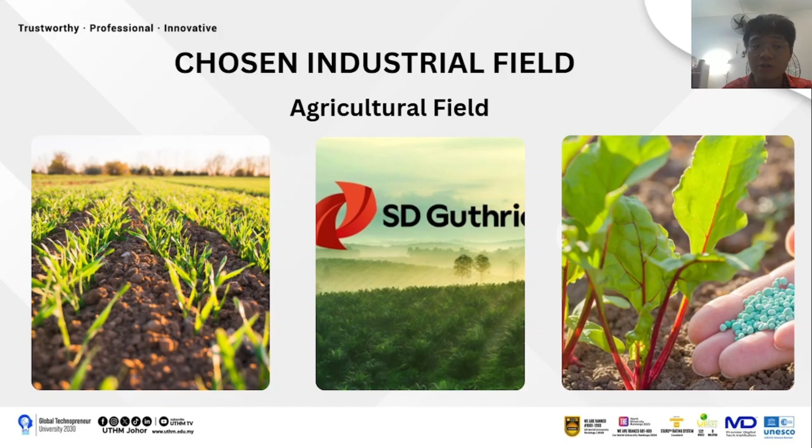Before we start, let me introduce the report contents: first, industries involved in the agricultural field; second, chosen industrial product; third, process involved in industry; fourth, advantages and disadvantages of conventional and green route processes; fifth, issues related to conventional process; sixth, impact of green route processes; and seventh, the related references within the last 5 years. So the first part is for me to present.

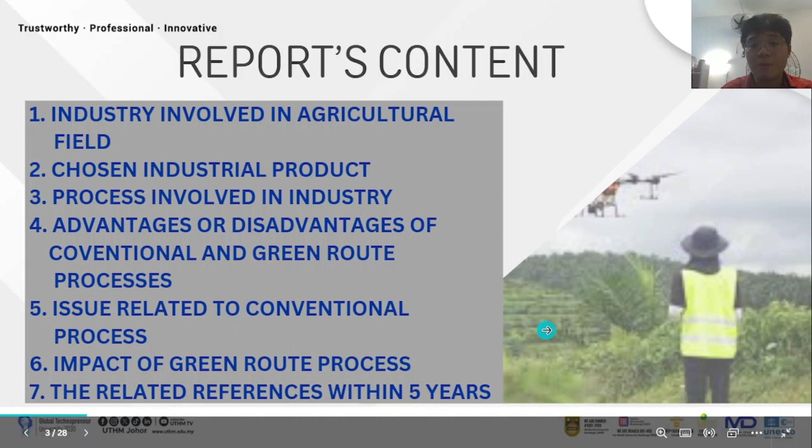Good day to everyone. I'm Won Zeng Cheng. The industry we chose, which is involved in the agricultural field, is Sd Guthrie Berhad. We chose Sd Guthrie Berhad as our industry because it is a large-scale local company.

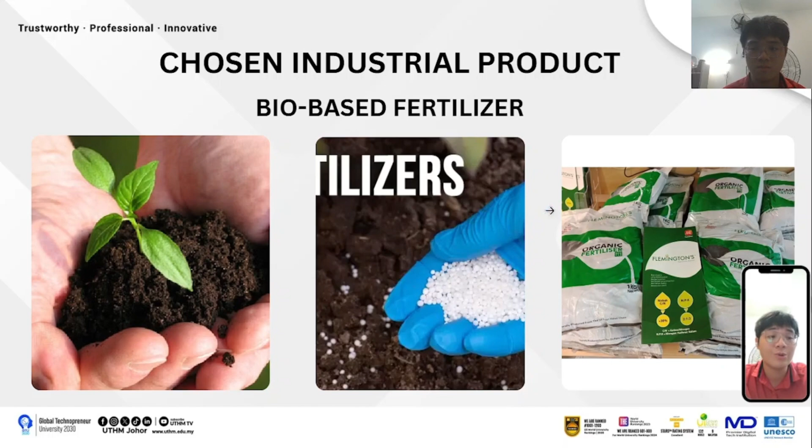Our chosen industrial product, produced by Sd Guthrie Berhad, is bio-based fertilizer. We chose bio-based fertilizer as our industrial product because Malaysia has high performance in plantation due to its geology.

Now I will present the process involved in the industry. Sime Darby, also known as Sd Guthrie Berhad, always focuses on its bio-based fertilizers through innovative practices in the palm oil industry. Now I will explain the process units involved in making bio-based fertilizer.

The first one is the composting unit. This unit utilizes palm oil byproducts such as inner kernel oil palm fruit. The next one is the fermentation and processing unit.

This unit converts palm oil into bio-based fertilizer through a process of burning to obtain ash, and this ash is used for fermentation.

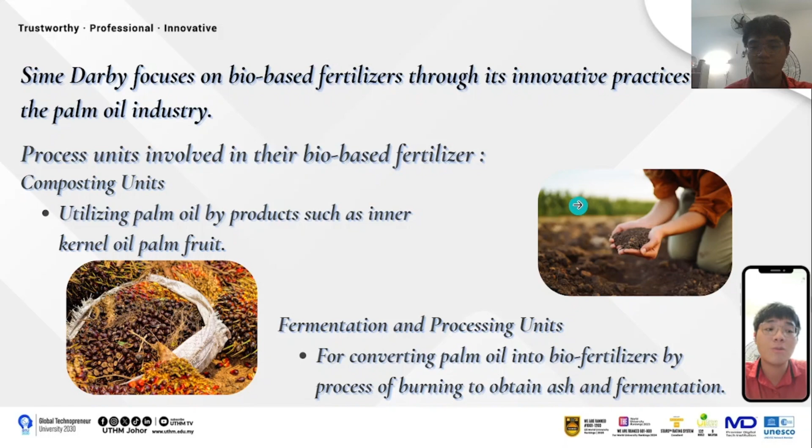The third process unit involved in making bio-based fertilizer is the quality control and R&D unit. This unit ensures the fertilizer meets environmental standards.

The last one is the distribution and application unit. This unit packages the bio-based fertilizer and supports large-scale plantations with eco-friendly fertilizers.

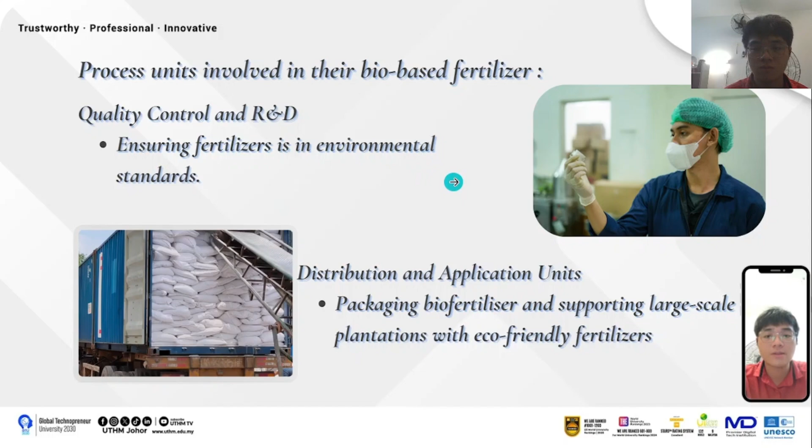After discussing these units, we categorize them as upstream, midstream, and downstream. Upstream is the composting unit. Midstream includes the fermentation and processing unit and the quality control and R&D unit. Downstream is the distribution and application unit.

Here is the detailed process for upstream. First, they collect the organic material, then undergo composting with aeration and temperature control, and finally maturation.

The maturation product is transferred to midstream, the fermentation and processing unit, where they produce biostimulants. After that, they undergo microbial inoculation, mechanical processing, and finally chemical processing.

After chemical processing, the product is transferred to midstream, the quality control and R&D unit.

Inside the quality control and R&D unit, they undergo fermentation and composting techniques, followed by optimization of bio-based fertilizer properties, control of temperature and moisture in composting, and finally microbial contamination prevention.

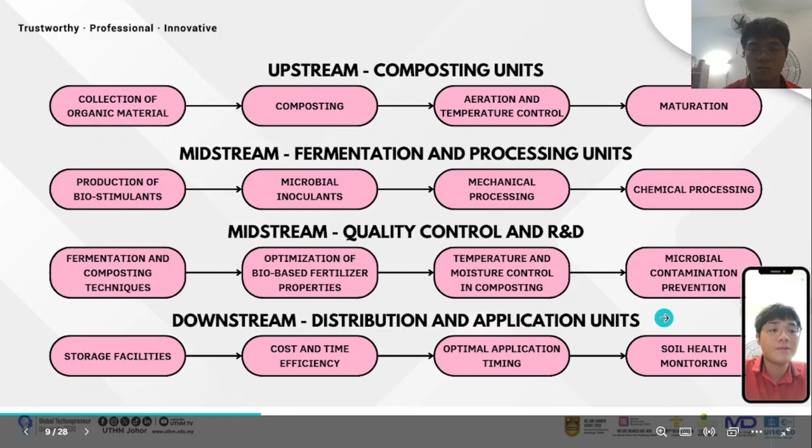So here are the detailed explanations for this process that occurs in upstream, which is the composting unit. The first process is the collection of organic material. Organic materials like EFB, known as empty fruit bunch, and other residues from palm oil are distinguished via milling process. Next process is the composting process.

Materials are composted through a bio-controlled process where microorganisms break down the organic matter into humus-like material, and this bio-controlled process uses enzymes.

The next one is aeration and temperature control. Proper aeration is maintained in the composting unit, ensuring oxygen availability to microorganisms, and controlling the temperature around 50 to 70 degrees to speed up the decomposition.

The last one is the maturation process. Compost is allowed to mature and become valuable bio-based fertilizer, which is ready for application to the plantation and harvesting.

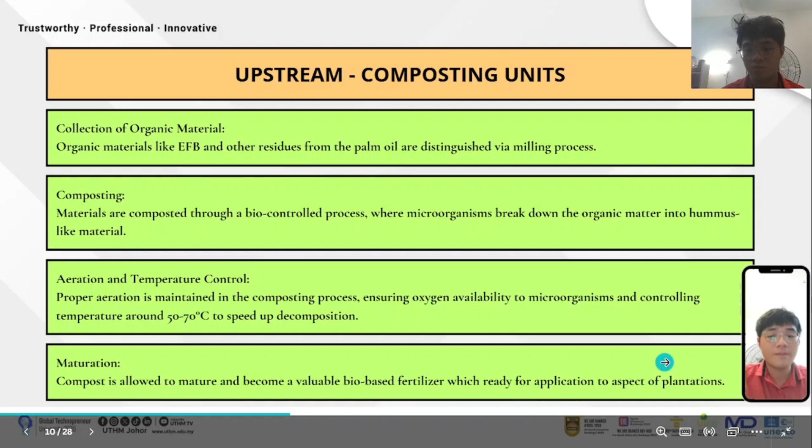Next are the detailed explanations for the process that occurs in midstream, the fermentation and processing unit. The first process is production of biostimulants. Fermentation is used to produce biostimulants from organic material, which are compounds that enhance plant growth.

Next one is microbial inoculants, such as nitrogen-fixing bacteria that help plants by improving nutrient availability, especially nitrogen.

Next one is mechanical processing. This process involves shredding, crushing, or grinding organic waste material into smaller pieces to accelerate decomposition during fermentation.

And the last one is chemical processing. In some cases, the processing unit may involve the application of enzymes to speed up decomposition, like neutralizing acids or enhancing microbial activity for effective fermentation.

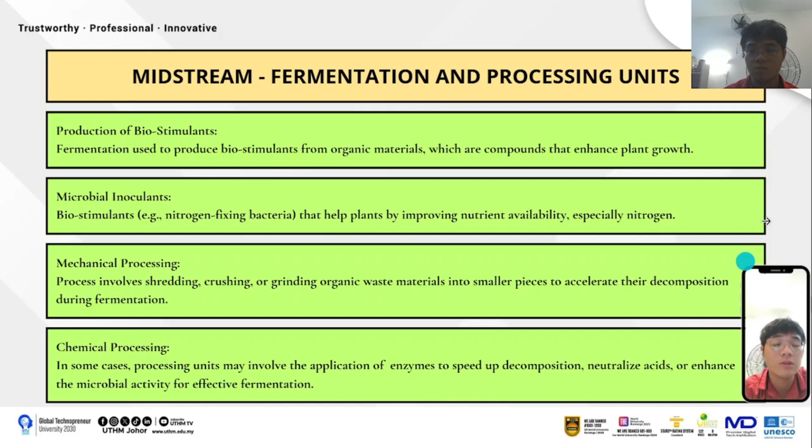Midstream quality control and R&D also have some processes involved in this unit. The first one is fermentation and composting techniques. We will do research into the fermentation process to ensure that the breakdown of organic material is as efficient as possible.

Next one is optimization of bio-based fertilizer properties. We will do research focused on refining the nutrient profile and slow release properties of bio-based fertilizer based on the condition. Next one is temperature and moisture control in composting.

During fermentation, temperature and moisture levels are monitored to ensure optimal microbial activity and proper breakdown of organic matter, because some microorganisms will only work efficiently at optimum temperature.

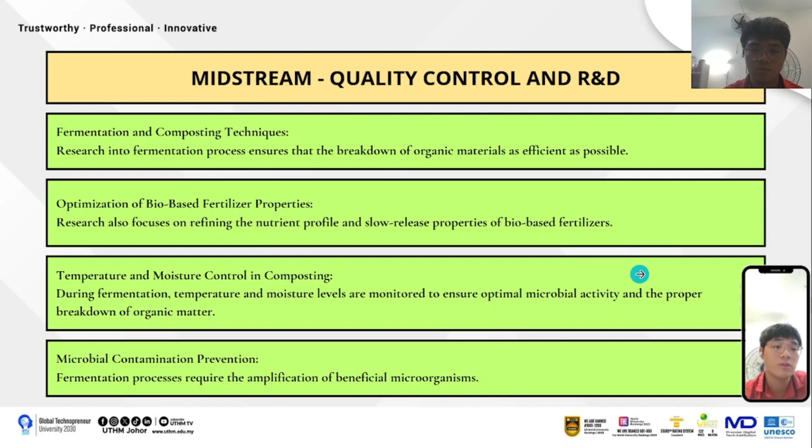And the last one is microbial contamination prevention. Fermentation processes also require the amplification of beneficial microorganisms, which is cell division. And also the last one, downstream.

Distribution and application units have some processes involved. First is the storage facilities. Once we produce the bio-based fertilizer, the fertilizers are stored in storage silos.

Next one is cost and time efficiency. The distribution process is optimized to reduce transportation costs and ensure fertilizer reaches the plantation fields in a timely manner. Next one is optimal application timing. The timing of fertilizer application is crucial to maximizing its benefits.

The last one is soil health monitoring. Fertilizer application is often combined with regular soil health monitoring to ensure that the fertility of the soil is continuously improved.

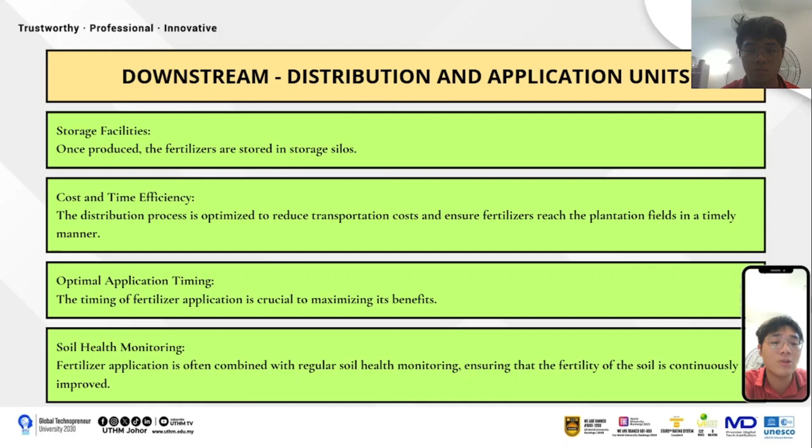Here is the overview for upstream, midstream, and downstream processes. Under the composting unit, we undergo collection of organic material, composting, aeration, temperature control, and also maturation.

Under the fermentation processing unit, we start with production of biostimulants, microbial inoculants, mechanical processing, and chemical processing. And under the quality control and R&D unit, we undergo fermentation and composting technique, optimization of bio-based fertilizer properties, temperature and moisture control in composting, and microbial contamination prevention.

And the last one, under downstream, we undergo storage facilities, cost and time efficiency, optimal application timing, and soil health monitoring. So this is the overview for the upstream, midstream, and downstream and how they work.

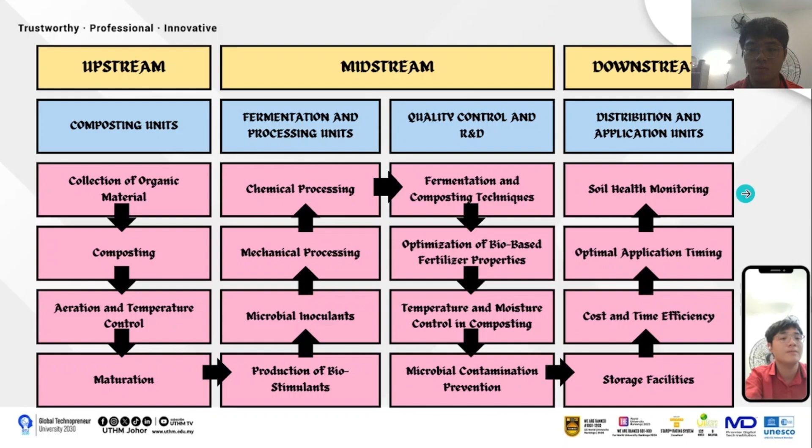As we know the Sime Darby process for making bio-based fertilizer, we also need to understand the equipment used for this process. The first one is the composting unit. The equipment used is oil filter machine, thresher, digester, oil press machine, and also the belt conveyor.

Here is the image for the oil filter machine. Next one is fermentation and processing units, where the equipment required is fermentation tanks, boiler, and steam generators.

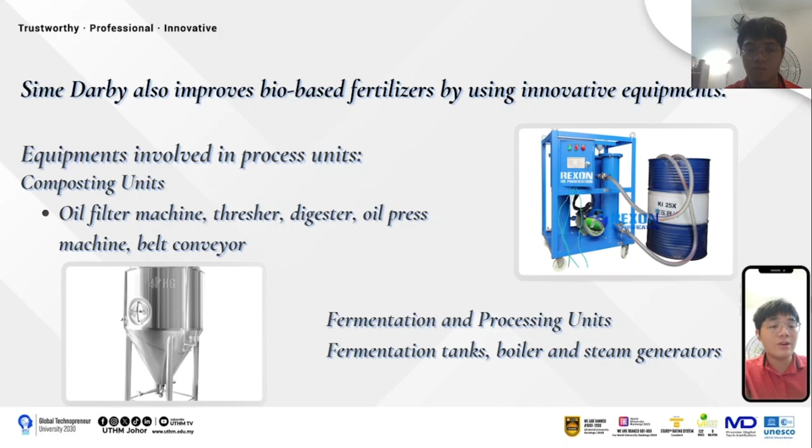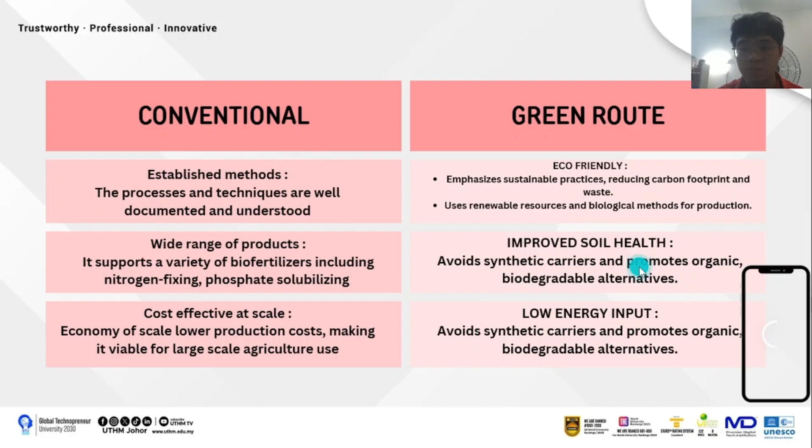Everyone, today I will explore the advantages of two important approaches in biofertilizer production: the conventional route and the green route. Both methods play a very significant role in agriculture, serving different purposes and coming with unique benefits.

Let's start with the conventional route. This approach is characterized by its established method. The processes and techniques in the conventional route are very well documented and widely understood, ensuring consistent and reliable production outcomes.

The second advantage is the wide range of products. Conventional processes support the production of a variety of biofertilizers, including nitrogen-fixing and phosphate-solubilizing types. This variety caters to the specific needs of different crops and soil conditions.

The third one is cost-effectiveness at scale. Due to economies of scale, the conventional route allows for lower production costs, making it viable for large-scale agriculture operations where cost efficiency is crucial.

Next, let's discuss the green route, which emphasizes sustainability and environmental care. Its advantages include eco-friendliness: the green route emphasizes sustainable practices, reducing carbon footprints and waste. It uses renewable resources and biological methods, making it an environmentally responsible choice.

The second advantage is that it improves soil health by avoiding synthetic carriers. The green route promotes organic and biodegradable alternatives, which enhances soil health and ensures long-term agricultural productivity.

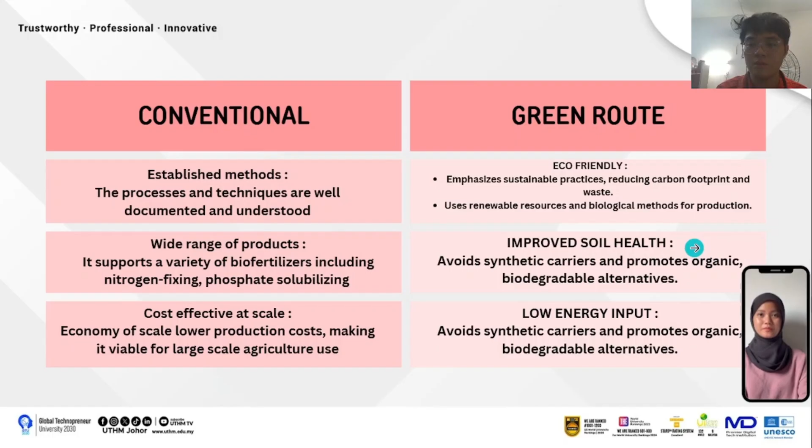We're going to delve into the disadvantages. Let's begin with the conventional route. Despite its efficiency and scalability, it has some significant drawbacks.

The first one is high energy consumption. This approach relies on energy-intensive equipment for sterilization, drying, and packaging. As a result, it consumes a significant amount of energy, contributing to higher production costs.

The second one is environmental impact. The conventional process generates more waste and may contribute to greenhouse gas emissions. This can negatively affect the environment and counter the purpose of eco-friendly agriculture.

The third one is dependency on chemical additives. Synthetic carriers and stabilizers are often required in the conventional route. This can degrade soil quality over time, affecting long-term soil health and productivity.

Next, let's discuss the green route, which, despite its eco-friendly benefits, also faces challenges. The first one is initial cost and infrastructure. Adopting sustainable processes requires significant investment in new technology and infrastructure, which can be a barrier for small-scale farmers and producers with limited resources.

The second one is scaling challenges. Decentralized production methods in the green route can struggle to meet the demands of large-scale agriculture, which may limit its application in regions requiring high volumes of biofertilizer.

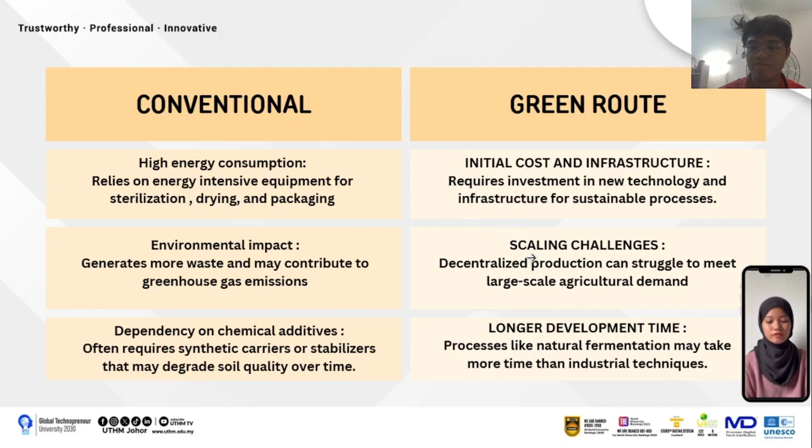The last one is longer development time. Processes like natural fermentation often take more time compared to industrial techniques. This slows the production cycle and can delay the availability of biofertilizer for farmers. That's all from me, thank you.

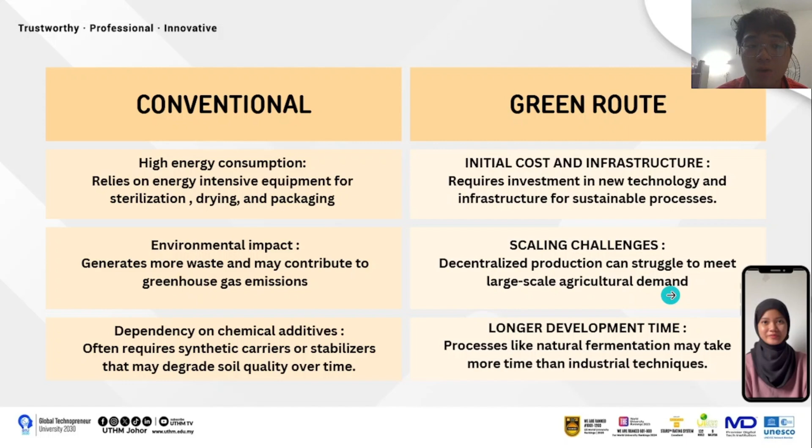So now for my part, I will explain the issues related to conventional chemical processes in biofertilizer.

Based on our findings, we have concluded that there are 10 issues in biofertilizer. The first one is energy-intensive processes: many conventional chemical methods require high temperatures, leading to significant energy consumption. This reliance on non-renewable energy sources increases the carbon footprint.

The next issue is environmental pollution: byproducts or waste from chemical processes may contain harmful chemicals that can contaminate soil, water and air. Excessive use of chemical fertilizers or improperly processed biofertilizers can lead to nutrient leaching and eutrophication in water bodies.

The third one is resource depletion. Conventional processes often depend on finite resources like natural gas, for example in ammonia synthesis, or mined minerals such as phosphates. Over time, the availability of these raw materials will be diminished or reduced, making the processes less sustainable.

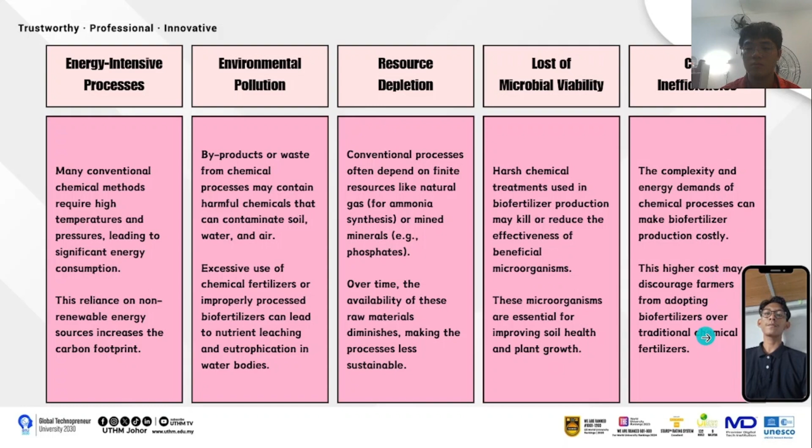The fifth issue is cost inefficiencies. The complexity and energy demands of chemical processes can make biofertilizer production more costly, and these higher costs may discourage farmers from adopting biofertilizers over traditional chemical fertilizers.

The next issue is quality and consistency issues. Chemical processes might not adequately support the diverse needs of different soil types and crops, and variability in the quality of biofertilizers can reduce their effectiveness in the field.

The next issue is over-dependence on additives. Some conventional processes require chemical additives to stabilize the product or enhance nutrient content, and these additives may have unintended long-term effects on soil and plant ecosystems.

The next issue is inefficient use of raw materials. Conventional methods may not efficiently utilize organic waste or agricultural residues, which are common feedstocks for biofertilizers, and this inefficiency can lead to resource wastage and missed opportunities for circular economy practices.

Another issue is regulatory and safety concerns. Handling and processing of chemicals in biofertilizer production can pose safety risks to workers and the surrounding community, and regulatory compliance with environmental standards can be challenging and costly.

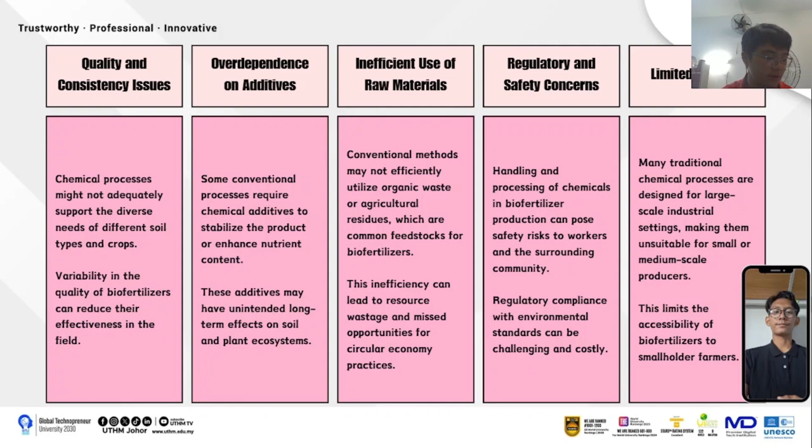Hi, my name is Laila and I will present about the impact of green process. In this slide, there are four impacts stated: environmental impact, economic impact, social impact, and technological impact. Before I go one by one, let me explain about the green process first.

So what is green process? Green process basically refers to environmentally sustainable practices and technologies which aim to improve agricultural productivity while minimizing environmental degradation. These practices often include organic farming, use of renewable energy, integrated pest management, sustainable water use, and soil health improvement strategies. So let's go through the impacts one by one.

First is environmental impact. This includes reduced carbon footprint through renewable energy and reduced reliance on chemical fertilizers and pesticides, which helps lower greenhouse gas emissions.

Next is biodiversity preservation, through crop rotation and organic pest control. These practices can support ecosystem health and reduce the loss of beneficial species.

Next is soil health improvement. Green process enhances soil fertility through organic composting, reducing erosion, and maintaining the soil's natural structure.

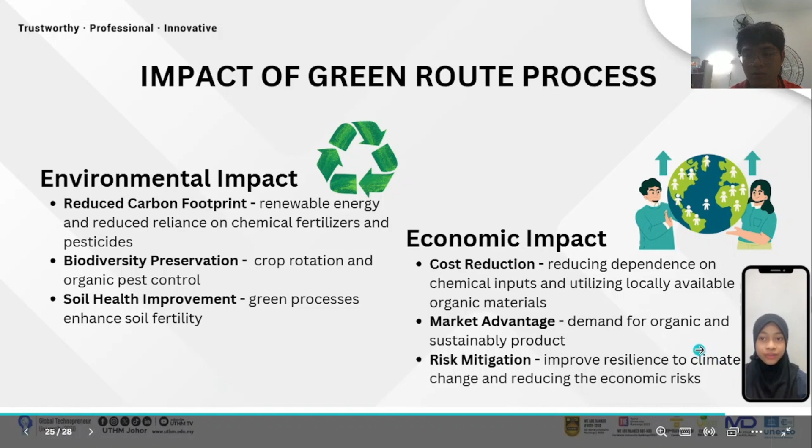Next is social impact, which includes improved public health, empowered communities, and enhanced livelihoods. In improved public health, reduction in chemical pesticide residues in food contributes to better consumer health.

Next is empowered communities. Green agriculture often involves local knowledge and community participation, fostering cooperative farming systems.

Next is enhanced livelihoods. Sustainable farming practices lead to stabilized incomes due to improved soil productivity and higher market value for green products.

Last but not least is technological impact, which includes innovation in farming techniques and data-driven agriculture.

For innovation in farming techniques, adoption of green technologies like drip irrigation for fruits and vegetables, renewable energy-powered machinery, and bio-based pest control can help enhance efficiency.

Next is data-driven agriculture. Integration of technology in monitoring resource usage helps in making informed decisions that lead to optimizing the process. That's all for my part, and I will pass the next part to the next presenter.